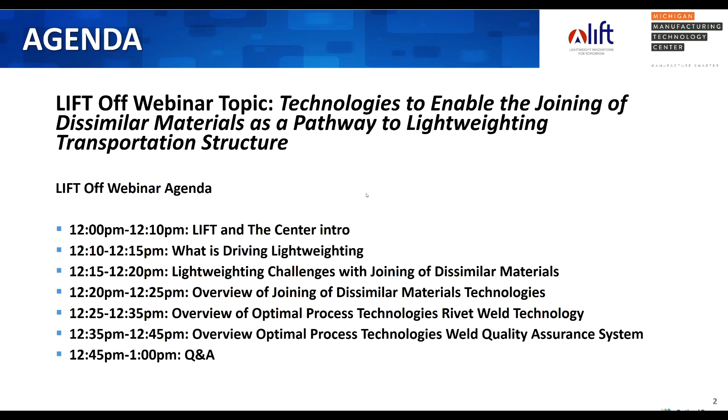So first, a little bit about Lift. We are one of 14 Manufacturing USA institutes around the country.

Manufacturing USA developed institutes to reinvigorate manufacturing around the country back in 2014. We were one of the founding members of Manufacturing USA.

Our mission is to accelerate the development and application of innovative lightweight metal production and manufacturing technologies to benefit both the U.S. commercial and defense markets. To do so, we have three legs of the stool we operate in.

We operate in technology development, the research and development of new lightweight solutions. We enable the technology transition, helping our member companies transition those innovative solutions into the marketplace.

And then we also focus on education and workforce development. We have instituted 40 different initiatives in our initial 5-state region, running from Michigan down to Tennessee, to better prepare the workforce of the future.

In terms of our technology, we operate in 6 different pillars of technology.

Those being melt processing, powder processing, thermomechanical processing, agile processing, coatings and corrosion, as well as joining and assembly. So all of the technology that we operate in spans the metalworking spectrum.

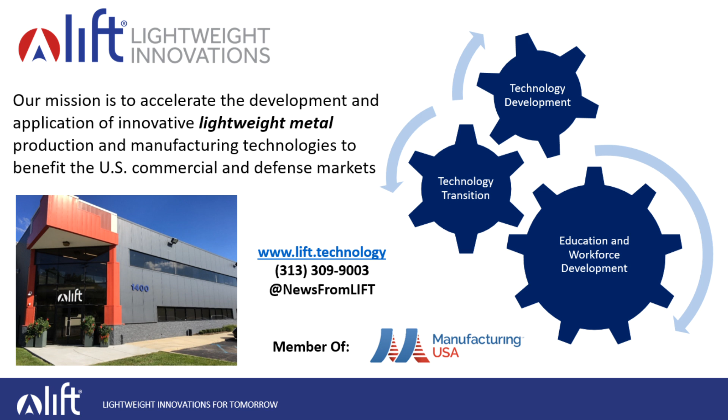So with that, I will hand it off to Elliot Forsythe at the center to talk a little bit about Michigan Manufacturing Technology Center. Good morning, everyone. This is Elliot Forsythe. Thanks, Joe, for the introduction. As Joe mentioned, we are part of the National Institute of Standards and Technology. We're one of 51 organizations across the United States whose sole purpose is to focus on small to mid-sized manufacturers and help them to prosper and thrive.

And to prove what we are actually able to do, in the past year, we have worked with over 400 companies, and for every dollar they've invested with us in projects, they've received a return financially of $106. So we're thrilled with that opportunity to work with small companies and to help them prosper and thrive.

Our relationship with LIFT started at the very onset back in 2014. And throughout the course of time, we have had the opportunity to bring on a very talented materials engineer, Greg Peterson, who I'll turn over to in a minute. But principally, our relationship with LIFT now is to turn back to our core mission about prospering and thriving. The great technologies and products that are developed by LIFT need to be commercialized into the marketplace.

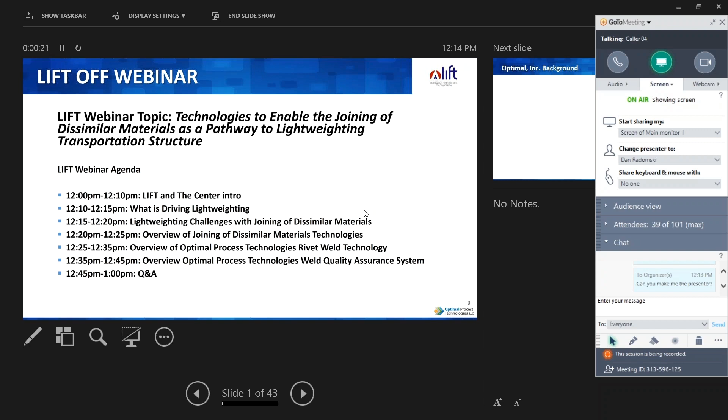So a little bit about Optimal and our group of companies. We have 3 companies, an established vehicle design and engineering firm that's been around quite a while as a tier 1 supplier supporting vehicle development, structural optimization, lightweighting. We have offices all over the world.

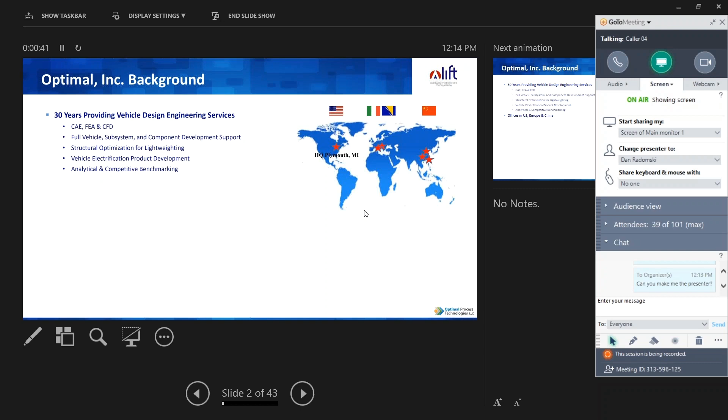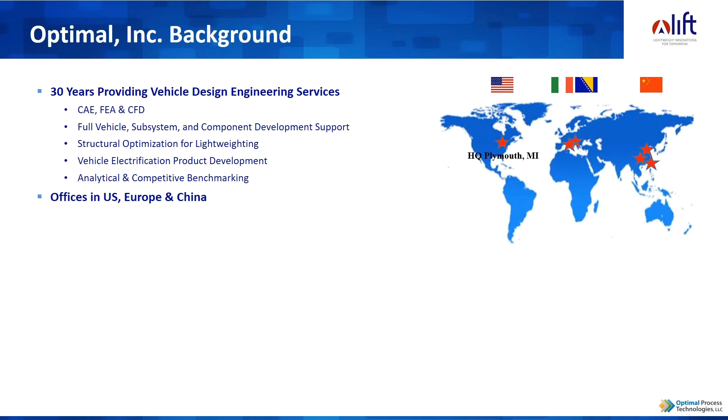We've been involved in electrification and lightweighting as one of our primary capabilities. Optimal is a group of companies, an established vehicle design and engineering firm. We also have two technology startup companies: Optimal Materials, which is focused on advanced materials including lightweight materials like bamboo composites, and Optimal Process Technologies, which is primarily focused on advanced manufacturing processes that support lightweighting and electrification initiatives. OPT is the company that is a LIFT member, and today I'll be presenting with our Chief Technologist, Dr. Tae Kim. We have a wide variety of customers in the automotive market as well as in other industries.

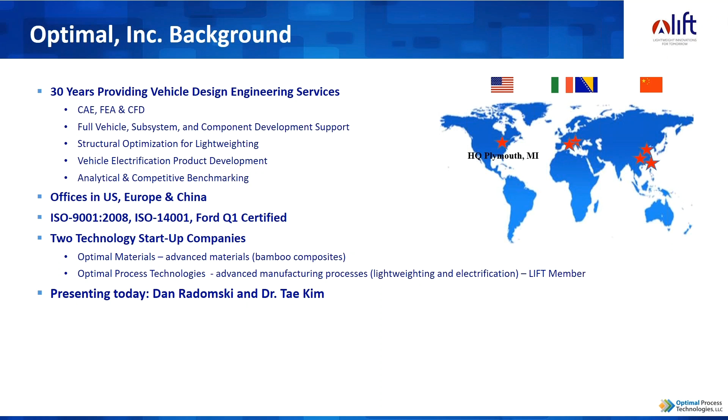So let's talk a little bit about what is really driving lightweighting. Regardless of what industry you're in, especially in transportation forms of all type, fuel economy and emission reduction requirements are really driving the need for lightweighting. In aerospace and other industries, we are operating fleets of vehicles like aircraft, and fuel savings that enable lower operating costs are driving the need to look at lightweighting solutions to improve those measures.

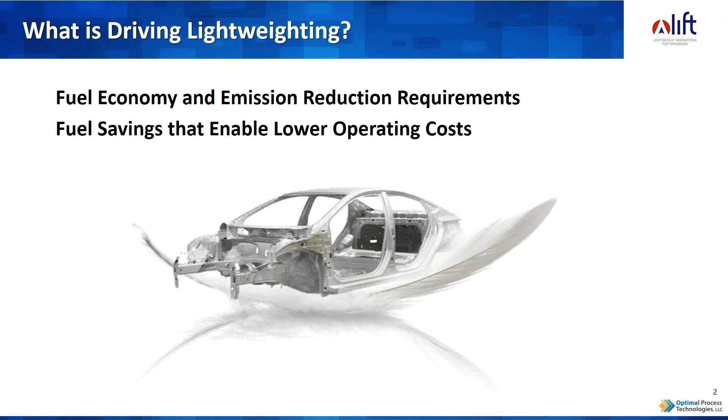The major drivers for those OEMs that are actually designing, developing, and selling transportation devices, whether it's automobiles, aircraft, Navy ships, or agricultural equipment, are government regulations. We're seeing it at all levels, whether it be CO2 emission reduction requirements or fuel economy improvement requirements, at the federal, state, regional, and local levels, as well as encouragements. So here's an example.

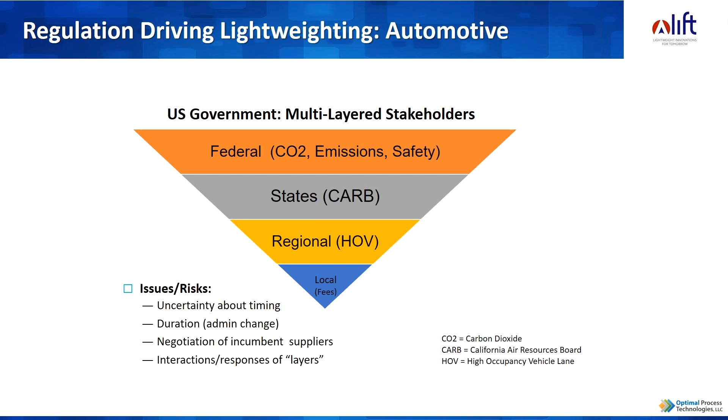In the U.S., most of you already know this, but the CAFE, or Corporate Average Fuel Economy requirements, are driving automotive vehicles, passenger vehicles, and light-duty trucks in the U.S. market up to standards of 54.5 miles per gallon across their entire fleet of vehicles that they're selling. There's also a number of other things driving adoption of fuel economy improvements and efficiency at the federal level for a wide variety of different industries.

At the state level, you're also seeing very aggressive measures. California, New York, and other states have clean truck vouchers and other incentives for OEMs and those that buy those vehicles to adopt.

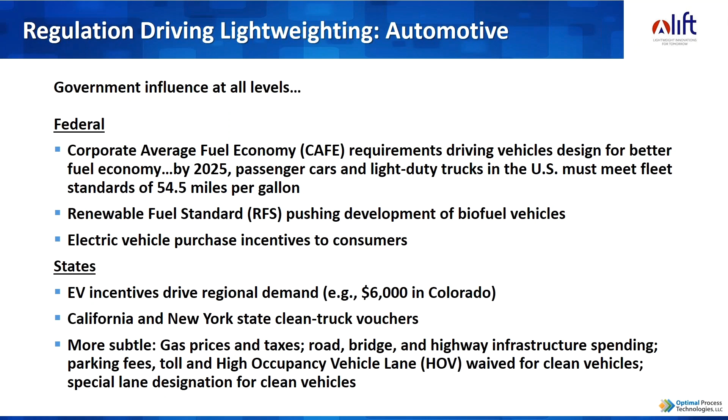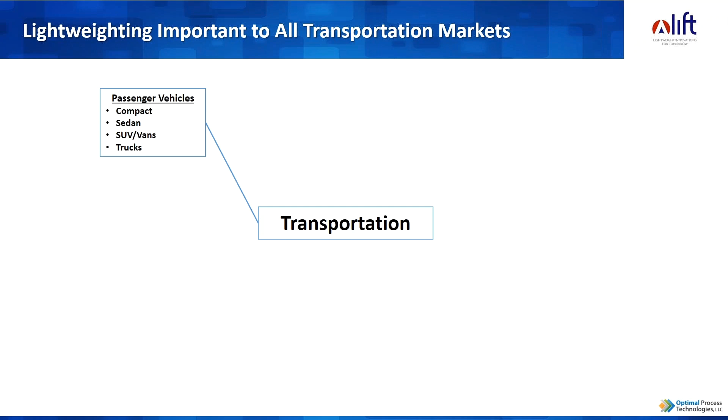About the transportation industry, anything that consumes fuel and creates emissions, CO2 or otherwise - we tend to think of the automotive industry as being the main driver because of the regulations, including the ones I shared with you. But as you get into commercial vehicle trucks, there's similar initiatives and activities driving this, even in military and defense vehicles, off-road vehicles, two and three-wheel vehicles, and obviously in other industries like aerospace, marine, and rail, where the entire industry is focusing on lightweighting as one measure of supporting fuel reduction and emission reduction.

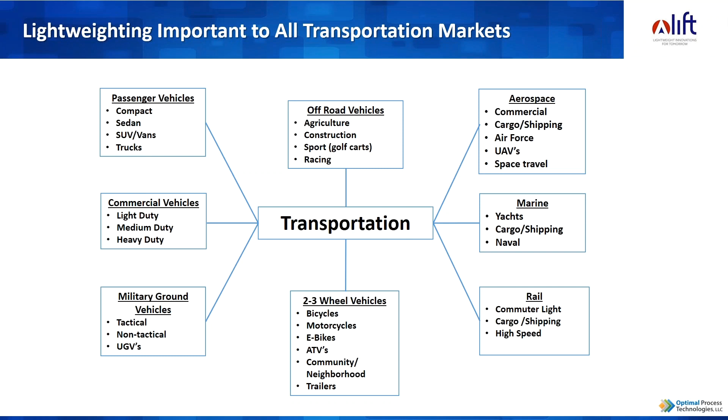Aerospace, for instance, has a number of approaches. Lightweighting is a big initiative on the actual structures, but there's also other ways to get at fuel consumption reduction targets and emission reduction targets, including improved aerodynamic designs and more efficient turbine engines in the case of aerospace.

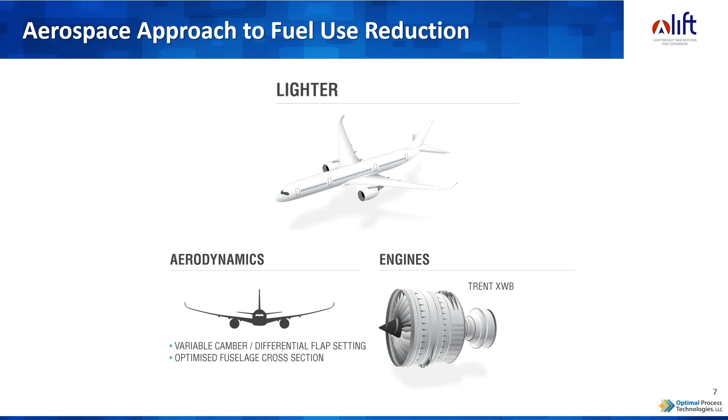In automotive, it's a multi-pronged approach, including electrification - and that's not just full battery electric vehicles, but hybrid vehicles and micro-hybrid vehicles. Obviously, lightweighting structures, including especially the body in white and body closures, are a key initiative. But there's also other approaches, including more fuel-efficient engines, transmission systems, turbochargers, and downsizing engines to like two-stroke engines in combination with a micro-hybrid battery. Many different ways the OEMs are approaching this, not only in the U.S. but abroad, to bring about opportunities.

Lightweighting is among the most important and popular strategies for reaching these goals. This is a chart that shows, among a number of measures surveying a number of automotive OEMs, the approaches they're using and focusing on to bring about better fuel economy, and specifically, in this case, reaching the 2025 CAFE requirements as mentioned earlier.

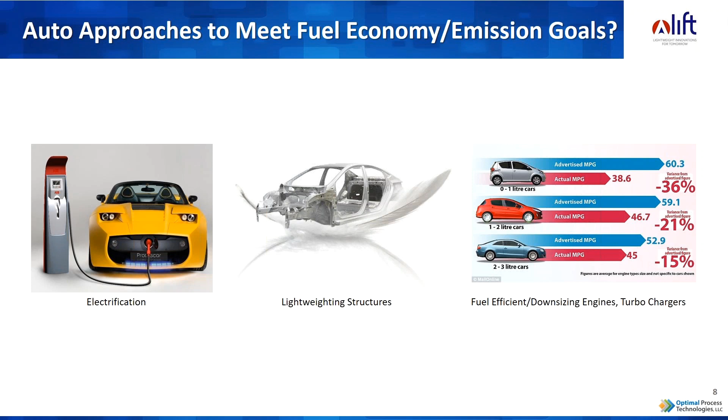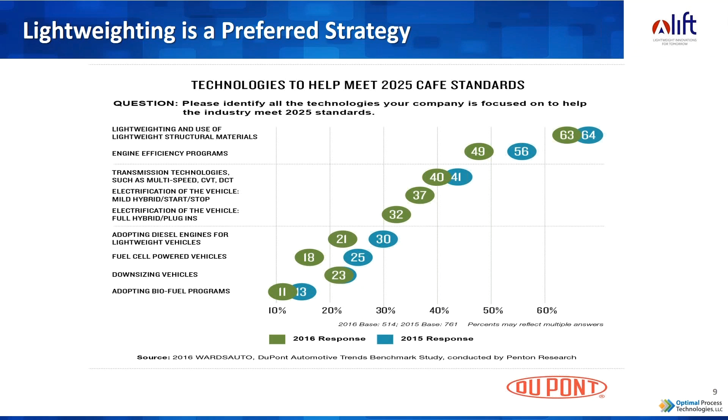As you move in this direction of lightweighting, one of the most popular approaches is obviously going to lighter weight materials. In most cases, you're finding that automotive OEMs are still in need of steels and high strength steels in certain areas of the vehicle, especially on the body in white, the structural domain of the vehicle, as areas like the B-pillar really need to be very high strength to support crash and safety standards. In other semi-structural components, they're moving towards aluminum, magnesium materials, even carbon fiber and other polymers.

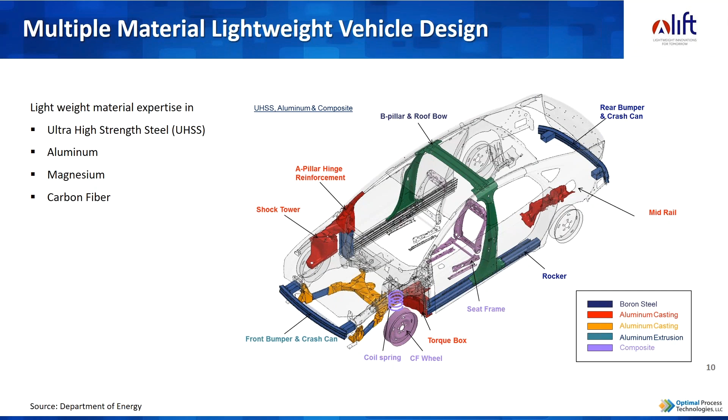And why are they moving in this direction? Because using the appropriate materials in the appropriate locations of the vehicle, you're still able to get at some of this lightweighting initiative and save weight. This is a look at our company, Optimal, which also does benchmarking on vehicles to appreciate the value of how vehicles are being designed.

This is an example of three hoods, or roofs, of vehicles for three different sedans that we looked at, that primarily use steel. We were looking at the opportunity to try to lightweight these structures by moving to aluminum. You can see here the weight savings that are possible if you're able to switch to aluminum while still maintaining the strength and durability the structure needs in its operating environment. It's significant.

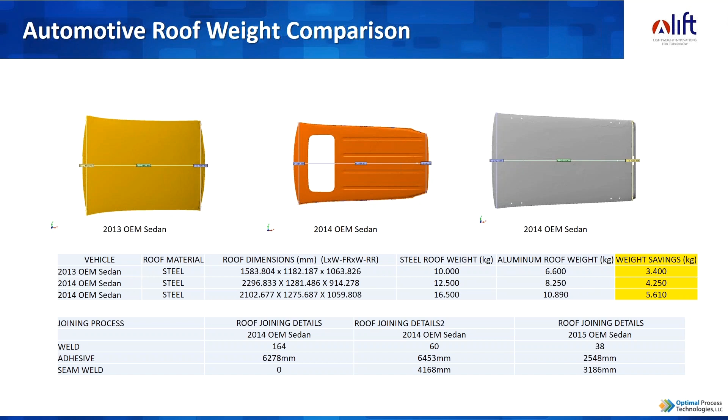The challenge being, when you have a mixed material strategy and you have, in this case, an aluminum roof, you have to join that aluminum roof generally to a high-strength steel.

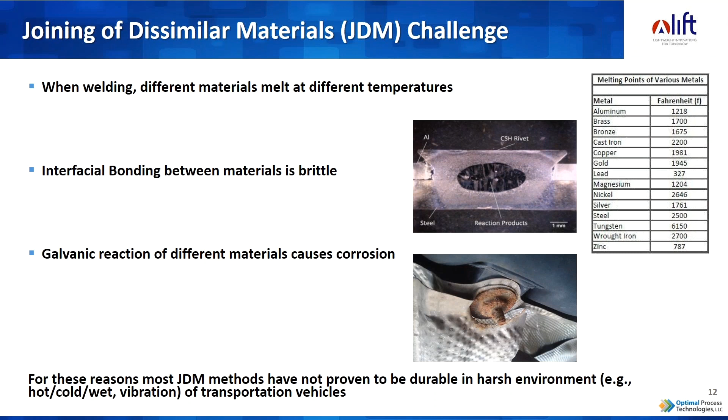So, just to give you an idea, we'll talk a little bit about Optimal Process Technologies and one of the technology solutions, a couple of the technology solutions that we're developing to address this problem. However, I wanted to make sure everybody was aware that there's a wide variety of industry players, academic institutions, all over the world, not just in the U.S., that are focused on trying to solve this problem, with many different approaches for different alloy joining being addressed for very specific industry applications.

So what you see here is the findings from a research study conducted in partnership with Optimal Process Technologies, the LIFT organization, and the Michigan Manufacturing Tech Center. What we did is look at all the joining of dissimilar materials technologies that were at least public and out there and funded, or that companies put out press releases about.

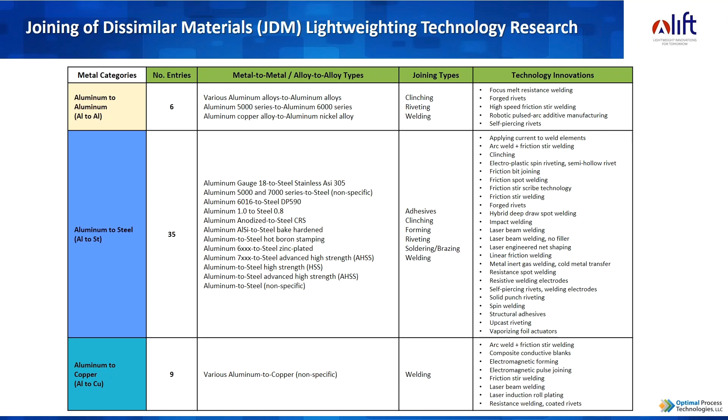As you'll see here, there's technologies addressing not only aluminum and steel, as I mentioned, but dissimilar aluminum alloys, like joining a 5000 series to a 6000 series of aluminum, and aluminum and magnesium, and steel to cast iron. Many of these are your traditional joining processes - riveting, welding, in some cases a combination of different technologies, including structural adhesives, cladding, clinching. I'm not going to spend a lot of time walking through this, but this will be available online as part of the entire webinar, where you can go back to it as a reference.

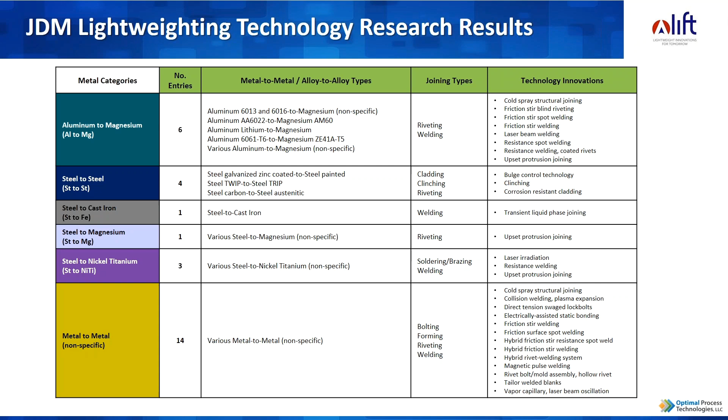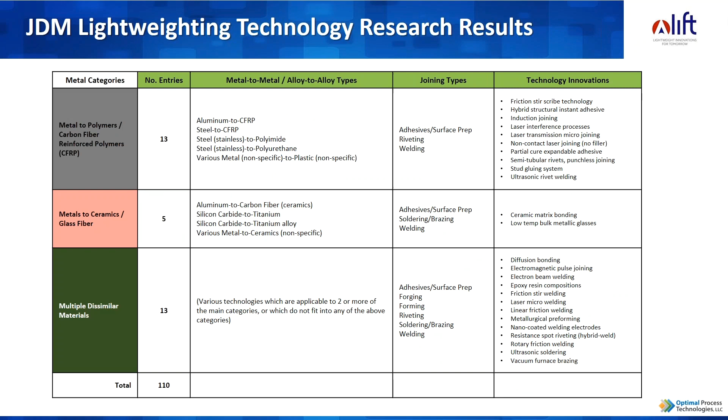So here's some examples of what we gathered in the way of at least publicly known technology areas of focus and solutions being worked on. Some may already be in production, some may not, in certain industries.

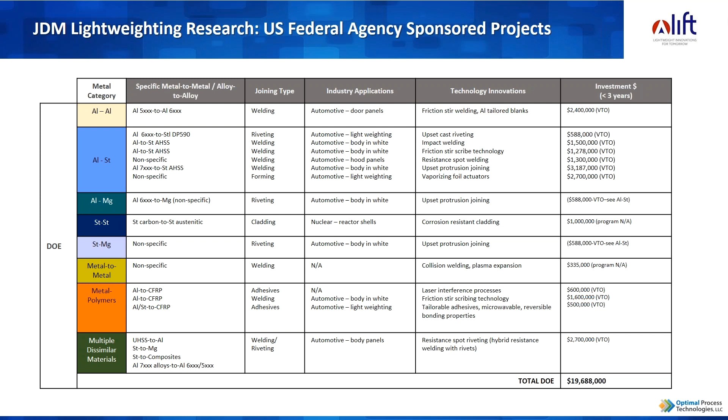We also included in this research quite a bit of information on what we knew about funded projects, especially if they were in the public domain. U.S. federal agencies, particularly the Department of Energy through the Vehicle Technology Office and otherwise, have invested heavily in this as a way to support lightweighting to improve fuel economy here in the U.S. and across a wide variety of dissimilar material joining areas, as you can see here, close to $20 million of funding. This may not be inclusive of all that's known and publicly funded today.

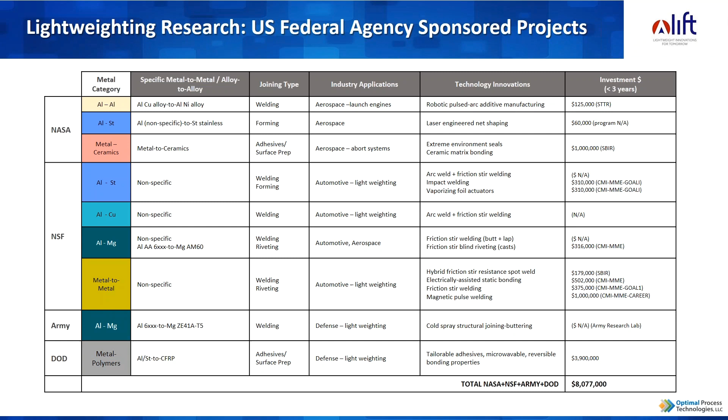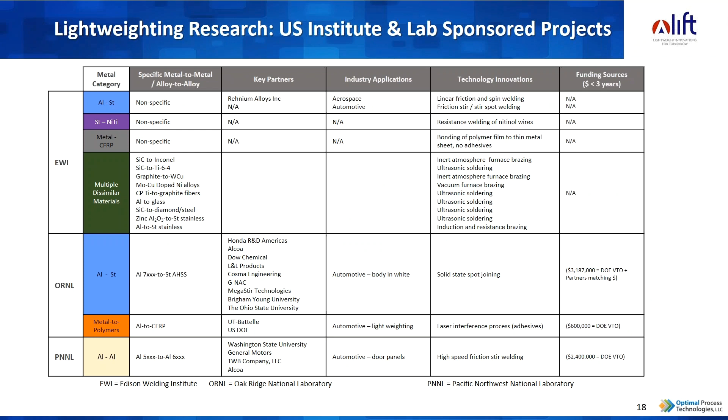And it's not just the Department of Energy - NASA, the National Science Foundation, the Army, and the Department of Defense all have projects in this area. Many of them are in the automotive, aerospace, and defense sectors. There's also quite a few U.S. institutes like LIFT and others, and national labs, that have focused programs on this, and they're doing excellent work.

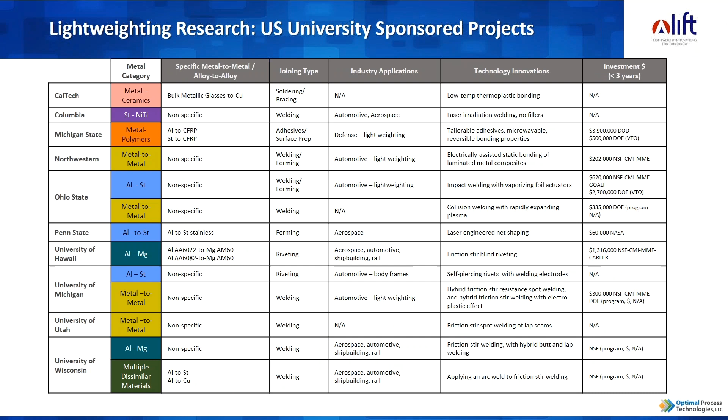Our academic institutions are leading the way as well in research on riveting, forming, and welding technologies focused on joining dissimilar materials. Some of these are federally funded projects, some are industry and/or university internally funded projects.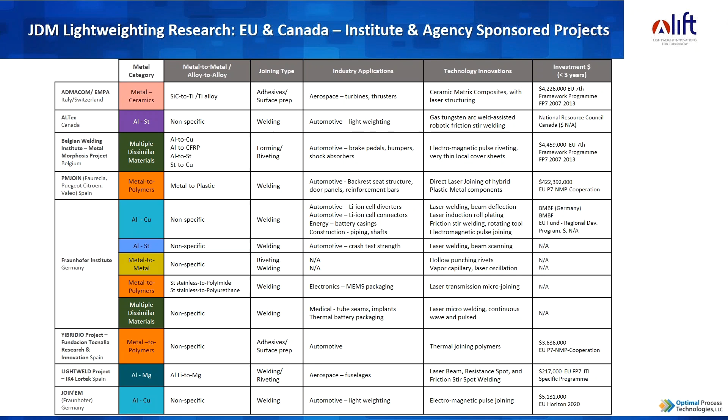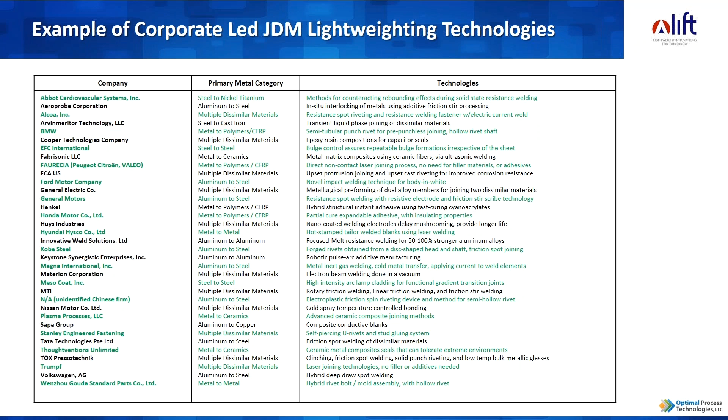Some of the more prominent industry players that have made known some of the industry applications they're focused on for joining dissimilar materials include the companies encapsulated on this chart. There are some really novel approaches here, not just for automotive, but aircraft, marine, and appliances - a wide variety of industry applications.

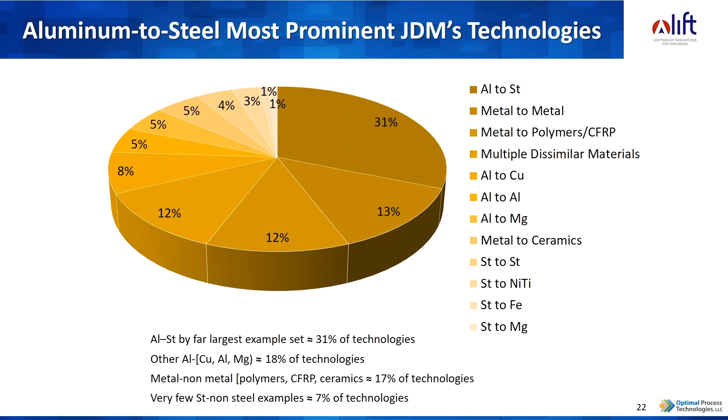Of the joining into dissimilar materials technologies that we researched, the most prominent that we could gather were focused on aluminum to steel applications, and that should be no surprise with a lot of them being in automotive and aerospace focused efforts.

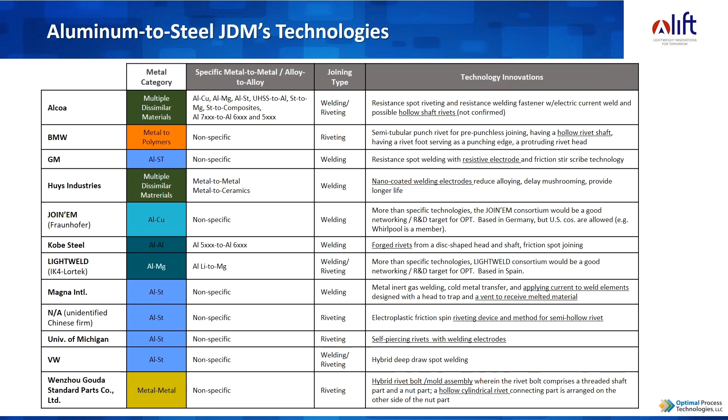Here are some of the more prominent aluminum and steel joining dissimilar material technologies, and some of the companies and/or universities and institutes that have ongoing efforts. As you'll notice here, there's quite a bit that is a combination of riveting and welding, which is in line with our technology solution as well.

So let's transition to Optimal Process Technologies, our company, and the technologies we're developing and how we're trying to help solve that lightweighting challenge of joining dissimilar materials effectively and ensuring quality welds.

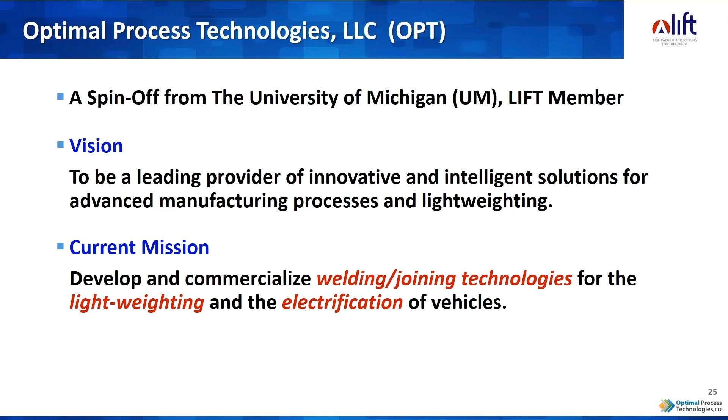Optimal Process Technologies is a spin-off of the University of Michigan. The technology was born there in partnership with an automotive OEM, and Dr. Tae Kim, who you're going to be hearing from here in a little bit, was at the university at that time, helping develop these technologies and putting them into commercial use. The company itself had always had a focus on advanced manufacturing processes and lightweighting as its vision and mission.

The technologies that we have unique intellectual property on include a hybrid joining process known as the rivet weld technology, where we have the ability in a one-step manufacturing process to both rivet and resistance spot weld in an effort to join dissimilar materials. And we can do this pretty effectively and have proven our ability to do it in a wide variety of material alloys and on different types of parts, sheet to sheet, sheet to casting, sheet to tube, for instance.

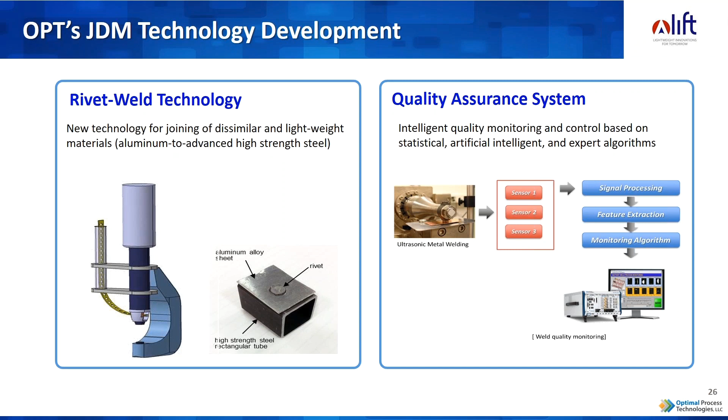We also have developed a rather unique machine learning weld quality assurance system that is particularly important for being able to measure, in a highly automated environment, a good weld versus a bad weld when welding dissimilar materials. Not only aluminums to steel, but aluminums to nickel and copper, in the case of welding of battery tabs and tabs of batteries to bus bars.

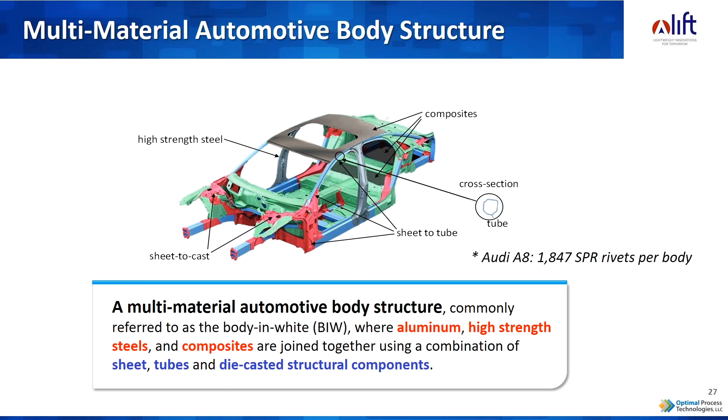So the areas that we've been focusing on with the rivet weld technology has been in transportation applications. In automotive, as I mentioned, a number of automotive OEMs that we're working with are looking to swap out certain body in white related components from steel to aluminum or to another lighter weight material. They are faced in that particular case with trying to adjust their automotive body in white assembly plants to be able to effectively join those dissimilar materials on the plant in a very quick and efficient way, and guaranteeing a very robust joint.

As you can see here, an average body in white could have as many as 2,000 rivets. So guaranteeing good joining is very important to ensure quality of the product.

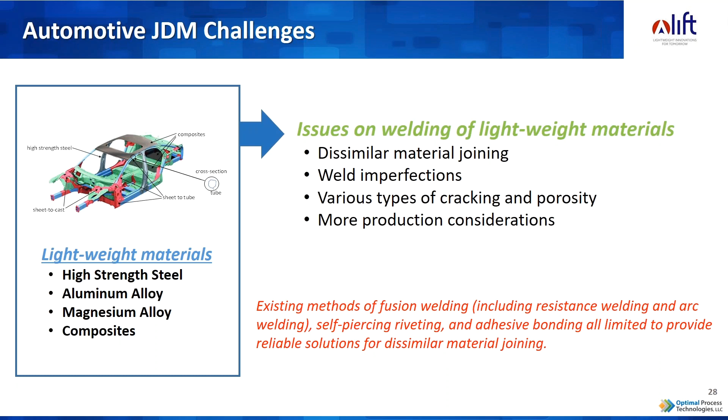The dissimilar material joining on a body in white, and we've seen this ourselves from benchmarking vehicles and teardown vehicles, is that you actually can experience weld imperfections due to the brittleness, corrosion issues, and various types of cracking and porosity that lead to catastrophic failure of those joints over time.

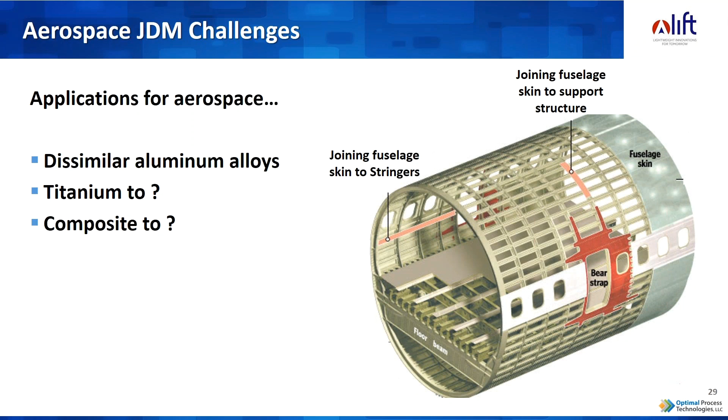We're also seeing this in our talks with aerospace OEMs, that the joining of dissimilar aluminum alloys is a real need, whether it's 5000 to 6000 series aluminum alloys or 2000 to 6000. Those applications are all over an aircraft, from joining the fuselage skin to their supporting stringers or support structures throughout the vehicle. So there's also quite a bit of a need to join titanium to other materials, composites to other metals.

So I'm going to turn this over now to Dr. Tae Kim, as an inventor of the technology, to explain a little bit how it works.

Hello, so this is Tae Kim. It's my pleasure to have a chance to speak about our technology. So as you see here, the overall concept of rivet weld is actually to take advantages from self-piercing riveting and resistance spot welding.

So we do use rivets, but rivet weld does not deform the rivet like self-piercing riveting does. We do melt materials and create nuggets like resistance spot welding. So let me try to explain the more detailed process.

In the figure, there are two stack-up materials, top and bottom. Top is aluminum, and bottom is high-strength steel, and the rivet itself is steel. The first step is to place the rivet on the top material, and then apply welding force and welding current. This initial welding current can heat up the rivet and top material so that the rivet can penetrate easily into the top material.

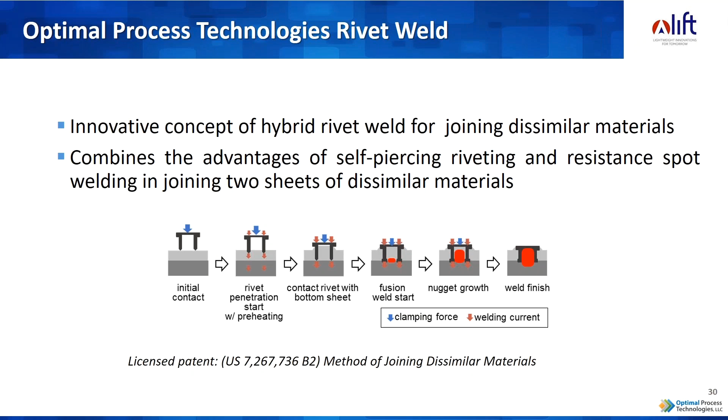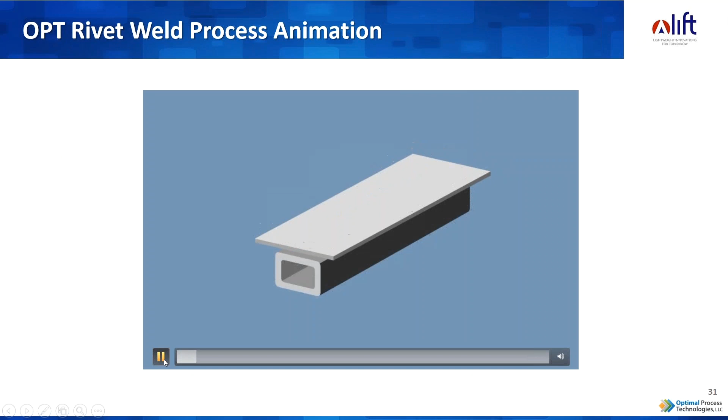Once the rivet reaches close to the bottom material, then we trigger a higher welding current to accelerate the material heating and melting. Then nuggets start to grow up, and this nugget is actually a mixture of aluminum and steel. So the nugget itself is an intermetallic compound, and this nugget is also encapsulated by the rivet and bottom materials.

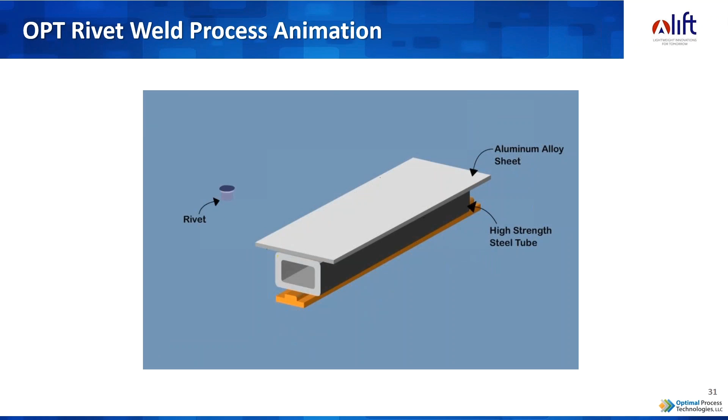We can move to the next page. This is an animation, hopefully it can play well.

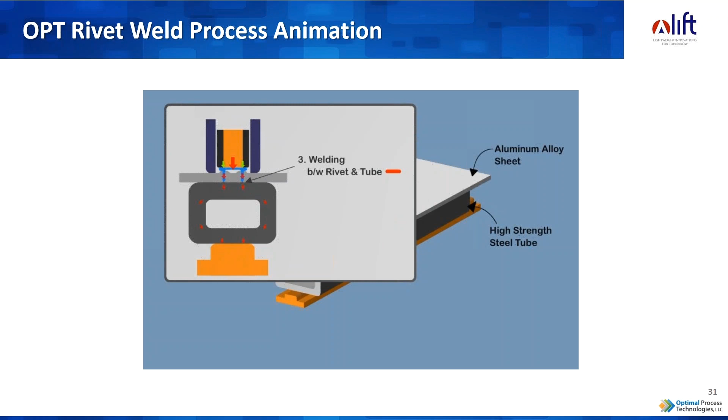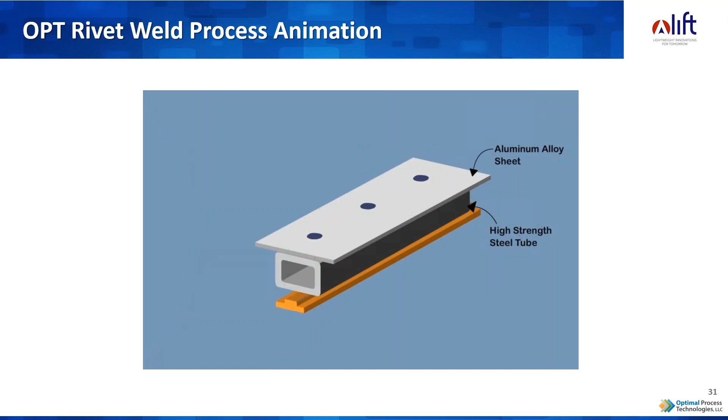In this animation, we're showing the real application case. Once we create the conduction, we put the feed rivet into the welding gun, and then process rivet weld. Since we are using low welding force, it does not actually require two-sided weld. Once we put the weld conduction, we can also do one-sided welding. We can even retrofit an existing resistance spot welding robot gun to achieve this welding process.

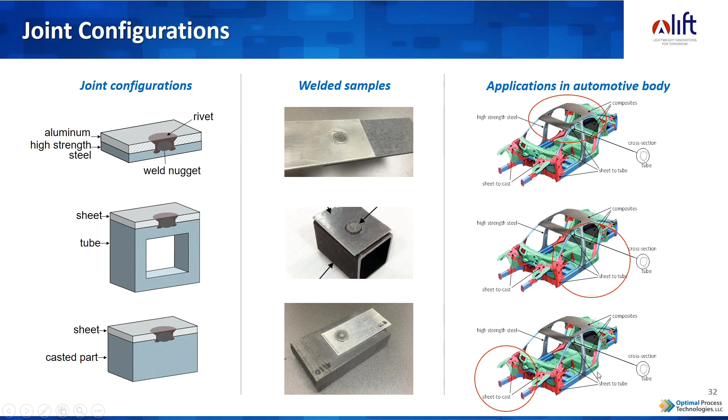Here's more technical detail. You see the weld cross section, and then a lap shear test. In resistance spot welding, when you join dissimilar materials like aluminum and steel, it can cause interfacial failure due to the very thin layer of intermetallic compound.

This interfacial failure mode is not good for fatigue performance in the auto body. But with rivet weld, we pull out the upper material, especially aluminum only, and the rivet and bottom material still stick together, weld together. You can see on the left side of this slide a cross-section image, and there is a new intermetallic compound formed as a nugget. But this nugget is covered by the rivet and bottom material.

The nugget itself provides a really strong bonding force, and meanwhile the outside covered melted part can provide good fatigue performance. We also compared this performance with resistance spot welding and self-piercing riveting, and this rivet welded sample performs a lot better than the two existing technologies.

I think what's really unique about this is that you have a joint that can work especially with very high strength stamped boron steels, which is a bit of a challenge. You can create a very flush joint where the rivet head is very flush to the top material and doesn't protrude out of the back side of the joint, which is particularly important in some applications. And it's a one-step manufacturing process that can be performed in less than 1 second takt time.

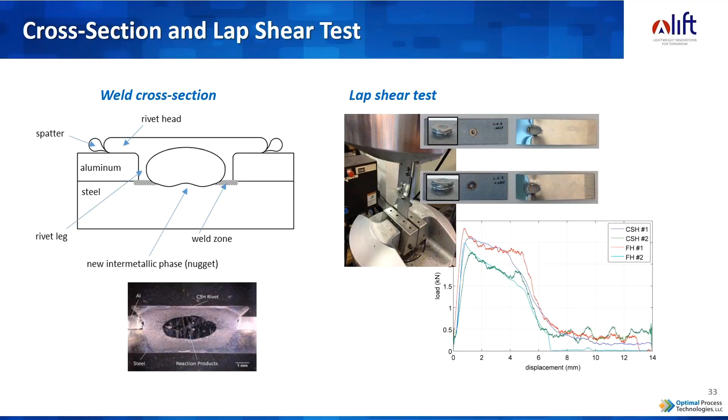Okay, let me continue about our second technology here, which is a quality assurance system.

Another challenge out there is guaranteeing the quality of weld, as I mentioned, when you're welding dissimilar materials. A big focus of the initial research that Tay was involved with at the University of Michigan, which has now proven commercially viable and is out in the market today, is weld quality assurance systems that particularly focus on measuring a good versus a bad weld, when joining dissimilar materials, even if it's dissimilar alloys within the same class, like different aluminums, as we mentioned earlier.

The focus of our research has been trying to put production quality systems in place, especially for high volume applications, that are very reliable across all types of welding applications, as you see here.

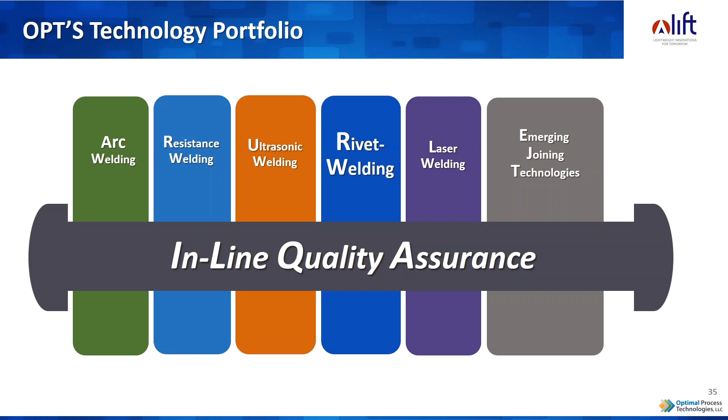We're finding that weld quality assurance for joining dissimilar materials is really important in applications where yield rates are bad on welds, like in lithium-ion battery plants. Sometimes you have 10 to even north of 20% failure rate on welds, joining the cell tabs together as well as the tabs to the bus bar. Also, applications where parts are too expensive to scrap are areas where weld quality assurance is particularly important. For example, a scrap battery cell, a lithium-ion battery, could cost as much as $5 depending on the amp hour format. And obviously areas where there's quite a bit of manual quality inspection labor needed.

We've found that in some applications, like battery welding, there's a large group of manual inspection people required to ensure none of the bad product gets out into the field. Warranty and recall issues of any product, including a battery that goes bad in a vehicle causing it to fail, can be catastrophic for a company. So basically where zero failure, and in areas where repair costs or line shutdown are too cost-prohibitive, these are great applications for weld quality assurance systems in general.

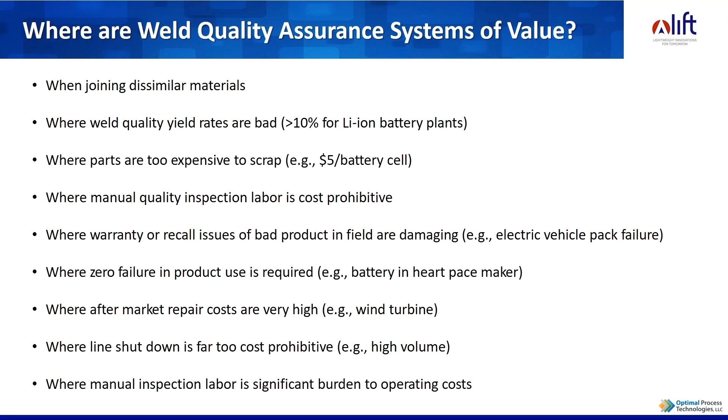What we're finding is that weld quality assurance systems in the past haven't been overly reliable, especially where you'd expect the signals from those welding applications to tell you pretty definitively if it's really a good weld versus a bad weld, to ensure nothing comes off the production line without manual inspection labor.

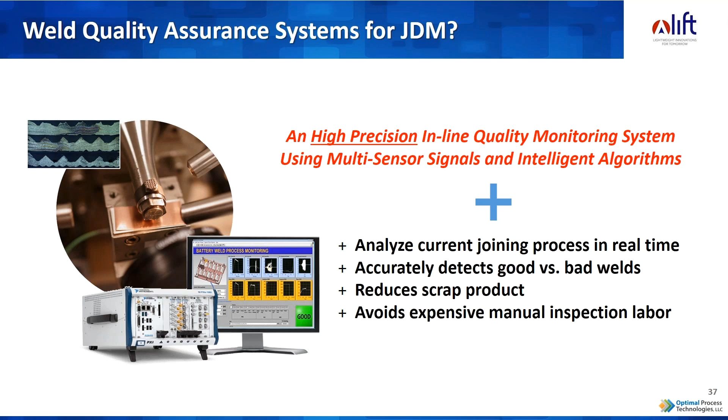That is the area of our mission and vision, to create these systems that are robust and effective. We'll be able to prove this in a number of areas, including ultrasonic welding for battery assembly, as I've mentioned. Tay, you want to talk a little more about this, our success here?

As Ben mentioned, not only myself but also our core team members have already developed a quality monitoring system for various welding applications. Each welding process actually has unique characteristics, which means we can apply different sensors and process information based on the weld type and application. But once the sensor signals and process information are measured, the process to develop the quality monitoring system is pretty much identical, as you see here.

We analyze the weld performance and compare it with characteristics such as metallurgical and visual properties, then do the signal processing, because raw sensor signal data these days is very high dimensional and large in size, not suitable for a real-time monitoring system. So we extract the key numbers, key features, key values to use as input for our quality monitoring system, so we can realize a real-time inline monitoring system.

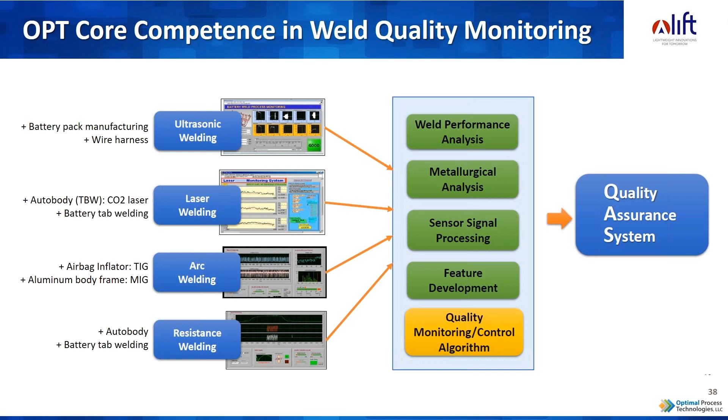And now at OPT, we envision developing and commercializing a very intelligent quality assurance system for various welding applications beyond this slide.

To explain more details, I'll use the battery welding application as an example. In battery cell module manufacturing, the most popular materials are pure copper, aluminum, and nickel. Those materials are highly electrically conductive, which is great for battery applications. But they are also highly heat conductive, which is very bad for welding applications.

Also, another issue: this is not a structural connection, it's an electrical connection. That's why if there's any bad electrical connection between cells, the battery pack module cannot deliver the designed energy and power. Even further, the battery pack life cycle can be reduced, because a poorly welded module causes other modules to use more energy and power than they should, making the entire battery pack life cycle an issue.

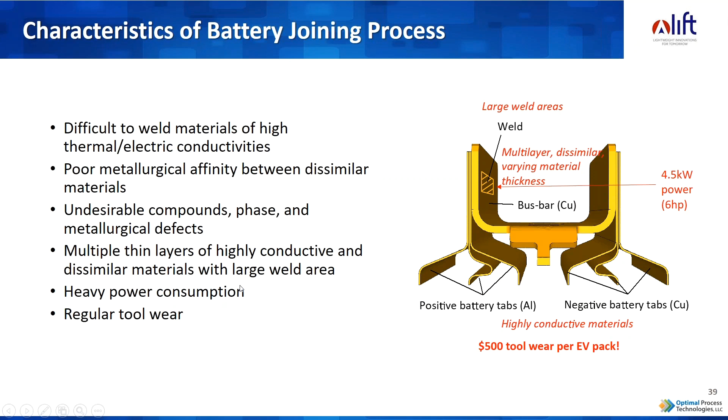Once we measure these signals - LVDT, power, microphone - we process them and extract only the key features, then put them into the monitoring system. But those sensor signals are very meaningful in explaining the welding process. Our algorithm then estimates the quality as either good, bad, or suspect weld.

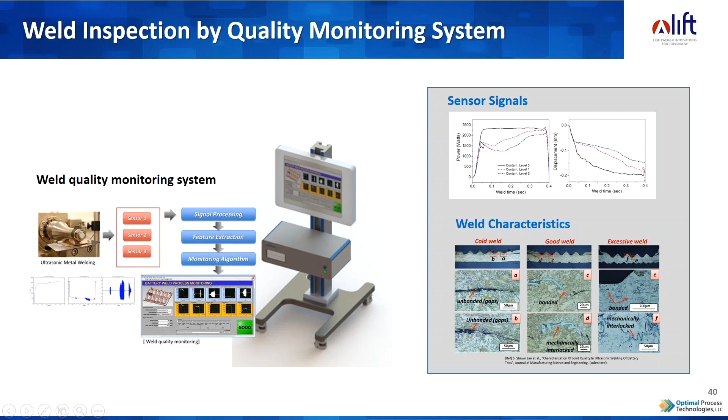Previously, our member was also involved in a project with the University of Michigan to develop this monitoring system for real application. The developed monitoring system was then applied at one of the OEM's battery assembly plants.

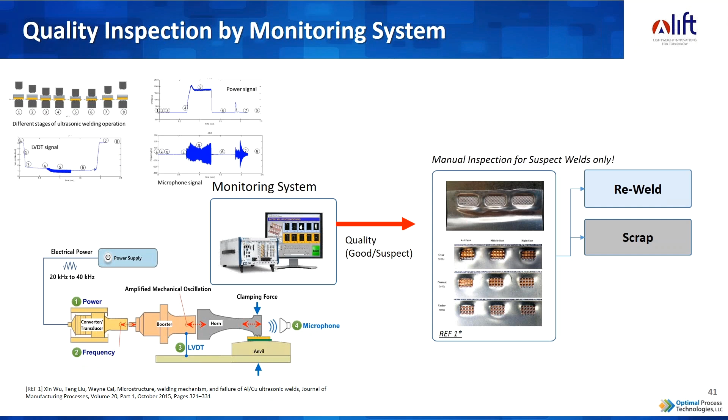Can you talk about the relative strength of the rivet weld versus the rivet only? That's a good question. The rivet weld is a fusion welding process, while self-piercing riveting is mechanical fastening and joining. The meaning of quality strength is totally different, because with mechanical fastening or joining, it will detach the materials, but with fusion welding, the welded part's strength is usually higher than the base parent material. That's why the rivet weld's strength is a lot better than any type of mechanical fastening solution.

Thank you. Another question that came in: how does the energy requirement compare to resistance spot welding, as a percentage? The real number is difficult to answer precisely, but let me explain.

Since we're increasing the contact resistance, when I have higher contact resistance I don't need to use a higher welding current — I can just use a lower welding current. Usually aluminum welding requires a really higher welding current. Also, when I use lower current, I don't need a big power transformer, which reduces the transformer size and the energy consumption a lot. I think it's close to half the energy consumption of resistance spot welding, simply comparing the welding current amount.